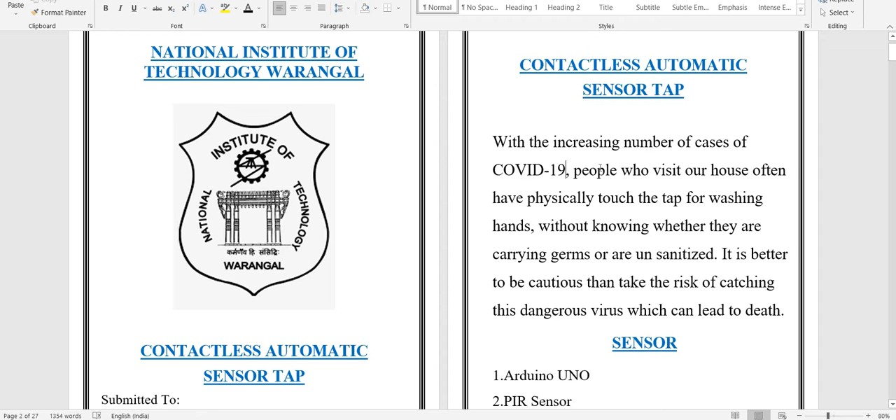So let us say that a person in these difficult times comes to your home. So the first thing that you ask the person to do is go to wherever your sink is located or wherever your bathroom is located and wash their hands. In that process, if they wash their hands, what they actually do is that they touch the tap for washing their hands or for allowing the water to flow.

Okay, so in that case, there is a chance of spreading COVID-19, because if a person who is touching the tap is infected, and a person who is completely healthy touches it, then there is a possibility that the healthy person can get COVID-19. So how do we prevent it?

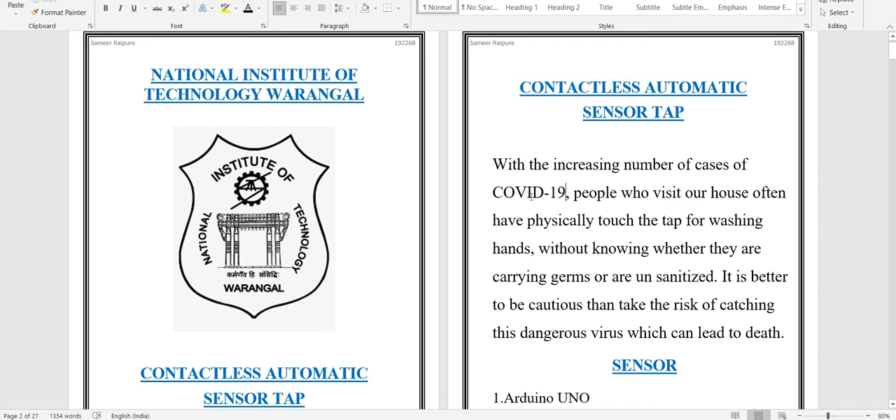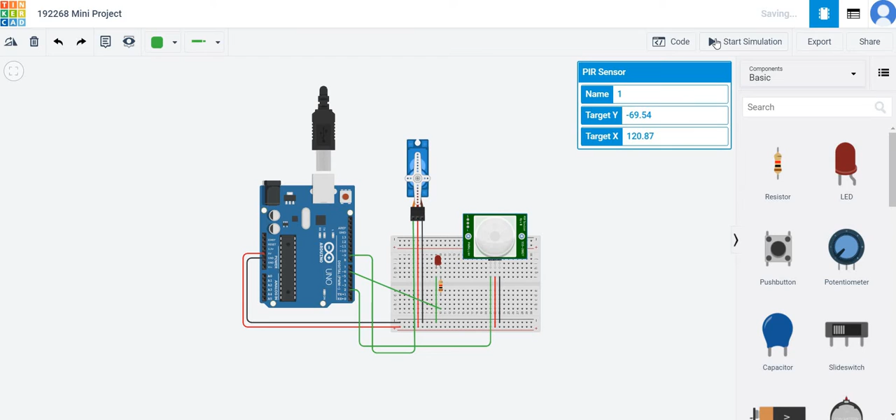So in my project, let us first of all go to the circuit diagram. I have taken a PIR sensor. So this PIR sensor, whenever something comes into its range, let us start simulating. Whenever something, ma'am, comes into the PIR sensor's range,

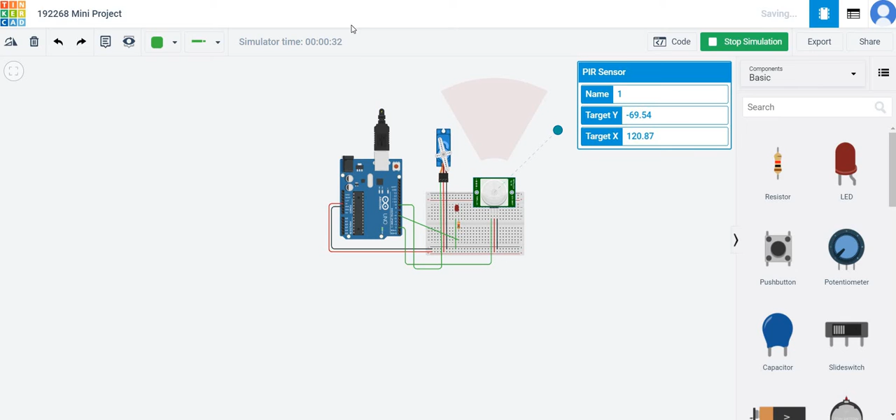then this servo motor that you can see here starts rotating, and whenever it comes out of the range, this servo motor rotates again and comes to normal. Okay, so if we are able to connect a tap to this servo motor, then we can have a functioning contactless automatic sensor tap. Okay, so speaking of 3D models, I have one here.

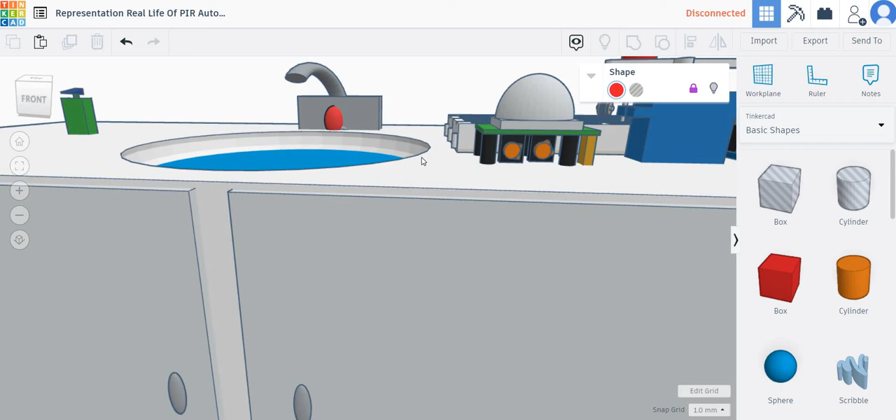So this is not the apparatus that would be there. This would be in a very miniaturized form, maybe in this box right here. As you can see, there is a box here, this would be in this box, and this red colored dome would most probably be the LED.

Okay, so what would happen is that if I come into the vicinity of the PIR sensor, let us say that maybe there is a hole and the PIR sensor is taking readings from here. If I come in this vicinity, then the water will start flowing and I would be able to wash my hands. As soon as I remove my hand or I move over here, the water would stop flowing. So this is a very efficient way.

Okay, now we are using this for washing our hands, and our primary concern is to prevent the physical touching and the flow of coronavirus. But this can also be used for water saving.

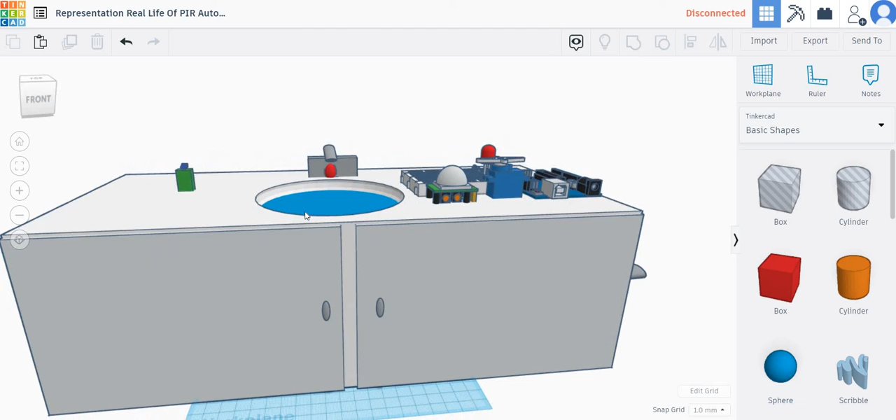Because as we all know, ma'am, when we are brushing our teeth, sometimes the water is on, and this leads to a lot of wastage. For a short amount of time it is not that visible, but for a longer amount of time we can completely see the wastage that has occurred. So as soon as you remove the brush from the region, the water stops flowing and helps to conserve more water.

Okay, now I have spoken about my project. Now let us go to the function of it. So as I've already said, this is a PIR sensor, and the PIR sensor and servo motor can be used for multiple things. In this particular case, we are using it as a contactless automatic sensor tap.

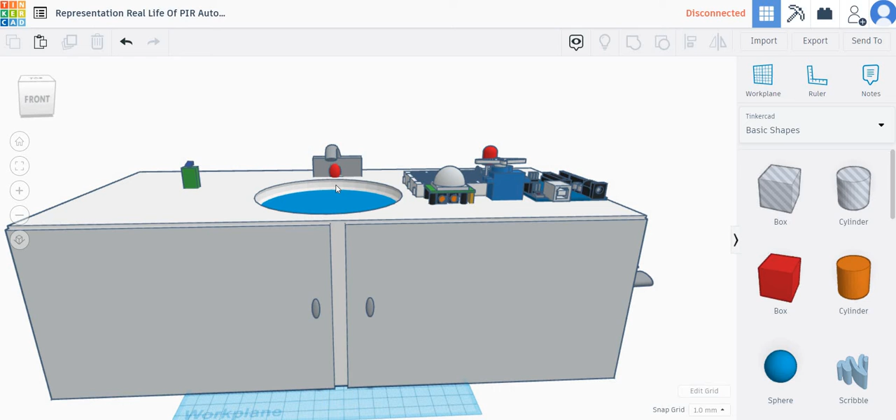Another way we can use it: let us say that this is a sanitizer dispenser, okay, and we put our hand over here and sanitizer flows in. So that might also be the case. Another purpose is not at all related to flowing water or sanitizer.

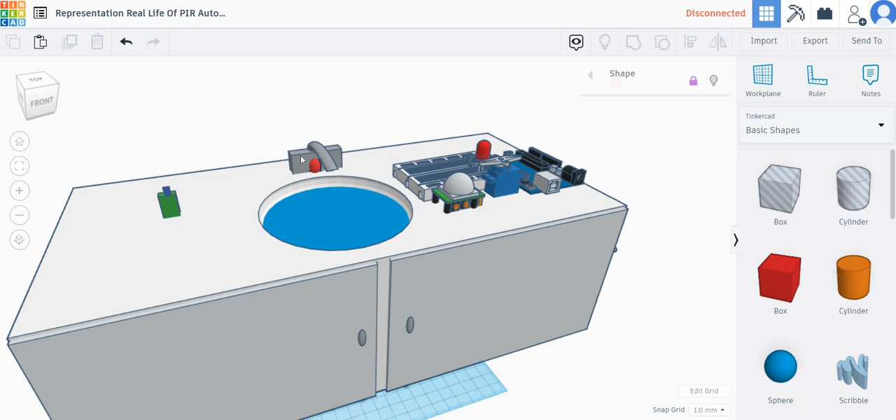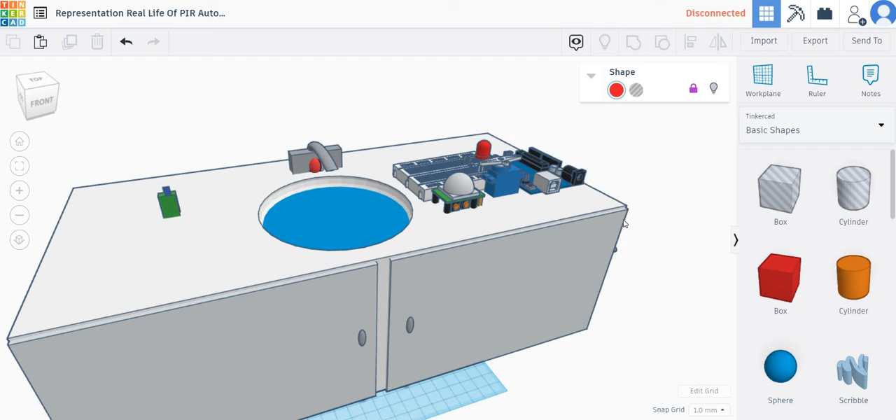Let us say that we use this same device, this box and this red light and the PIR sensor, and put it in front of our yard or our lawn. Then we would be able to know if someone is present there. We can connect buzzers or wires to it, and hence we would be able to know if someone has come into our house. Okay, so these are the applications.

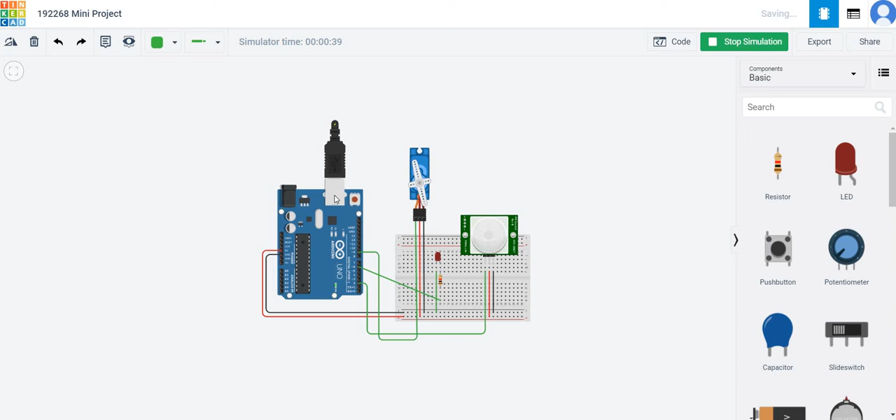Okay, now let us understand the circuit map. So as we can see, this is connected, meaning the simulation has started. As I've already displayed, this is a PIR sensor, and let us say that this thing is our hand, okay, and we are out of the vicinity of the PIR sensor's range. What if I go inside? As we can see, the servo motor rotates.

Now due to the rotation of the servo motor, we'll connect the tap over here and the water would start flowing. As our hand is there, we want the water to start flowing, and the LED is also glowing in order to demonstrate that yes, the water is flowing. So if in any case the servo motor has stopped, the PIR would detect and the LED would start glowing, but the servo motor would not work, and we would come to know that the servo motor is faulty.

Okay, now what we can see is that the servo motor is continuously on and the water is running. Now let us say that if I go away or stop washing my hands, then we can see the servo motor would come back to its original position and the water would stop flowing.

Okay, so same case, if I'm washing my toothbrush and I want some water on my toothbrush, then I come below the tap and the water starts flowing, and as soon as I bring the toothbrush close to my teeth, the water stops flowing. So this also helps in water conservation.

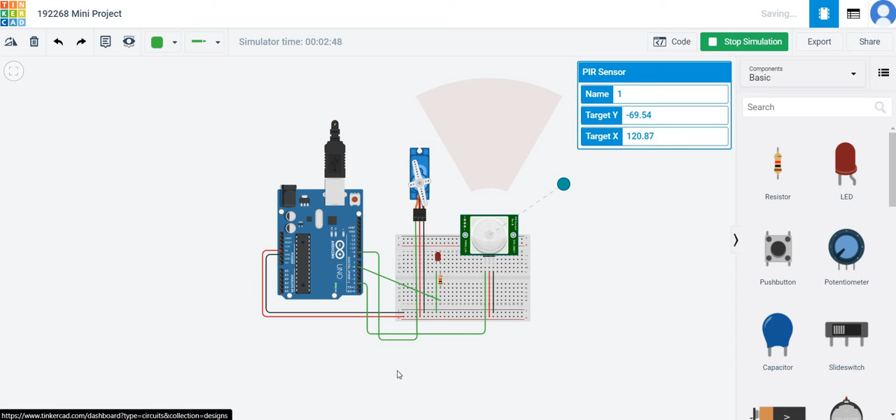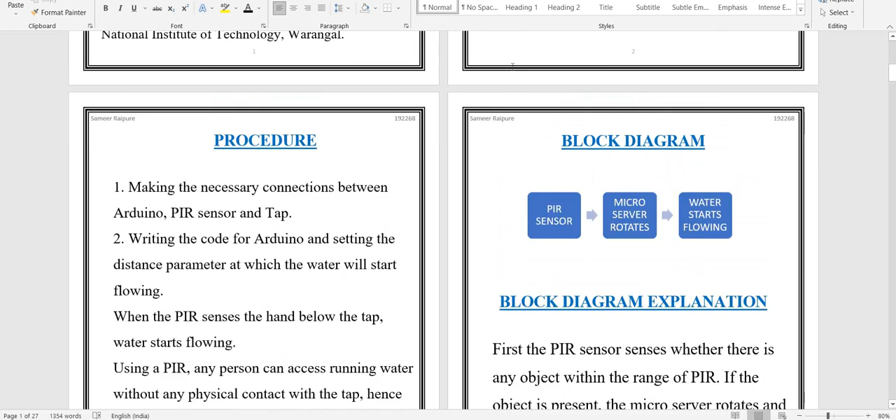So now let us go through my Word document. Okay, so these are the components that I've used. I've used Arduino Uno, the PIR sensor, LED, and resistor. The resistor is just for the LED. It is not really necessary, but since we are using an LED and we need to regulate it, we are using the resistor. This is a block diagram.

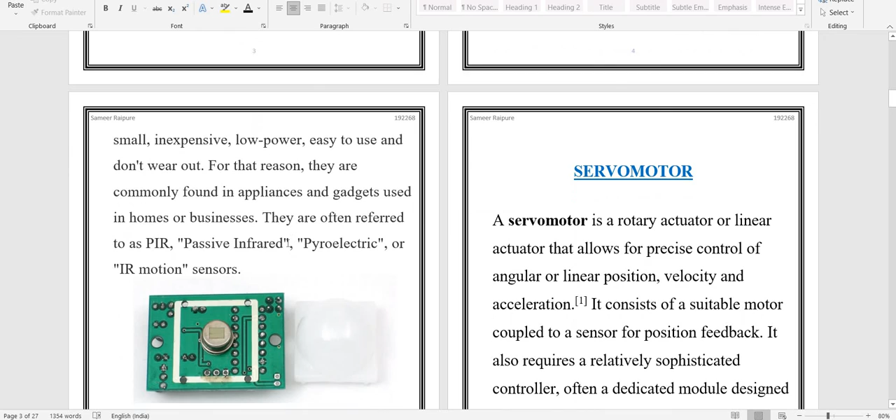The PIR sensor senses, and on the basis of that the information goes to Arduino Uno, and the Arduino Uno rotates the servo, and hence the water starts flowing. Okay, so here is the write-up for the PIR sensor, and the photo is here. This thing that you see is just for range modification. The actual device is only this. This is the main thing.

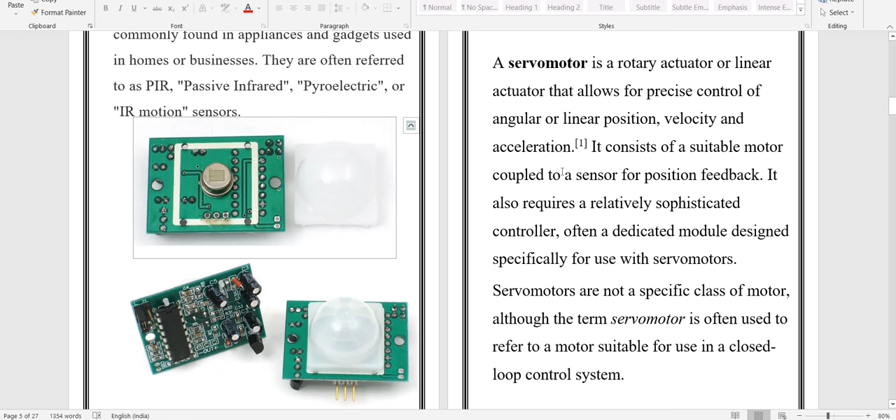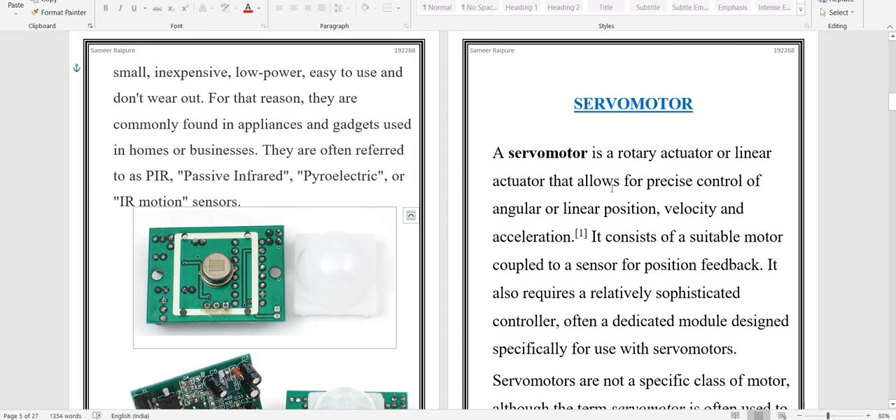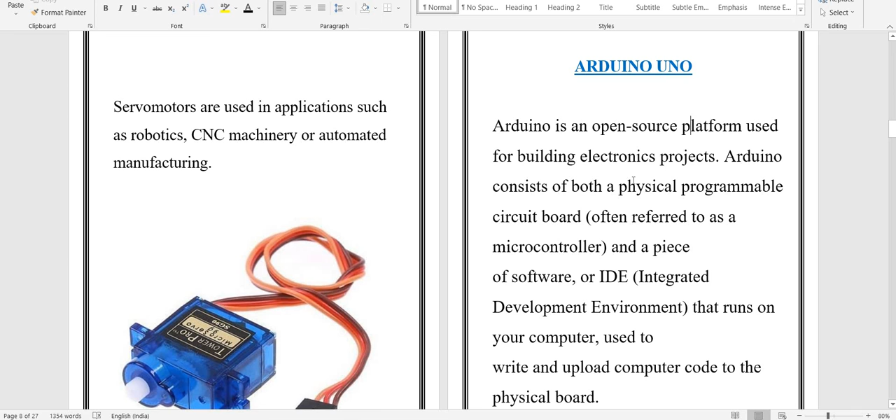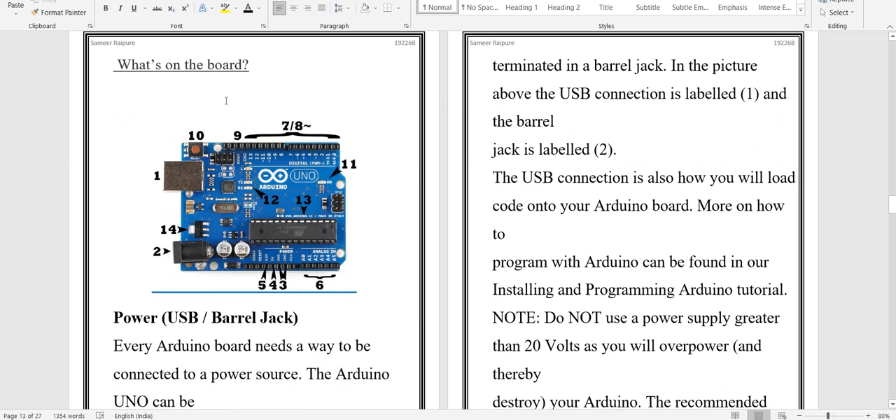Okay, and now we'll see what a servo motor is. A servo motor is nothing but a normal motor, but it is more precise. Okay, and this is how it looks. I have also used it in real life. And Arduino Uno. This is a programmable circuit board, and this is exactly how it looks. I have also explained what's on the board, which is available in my write-up.

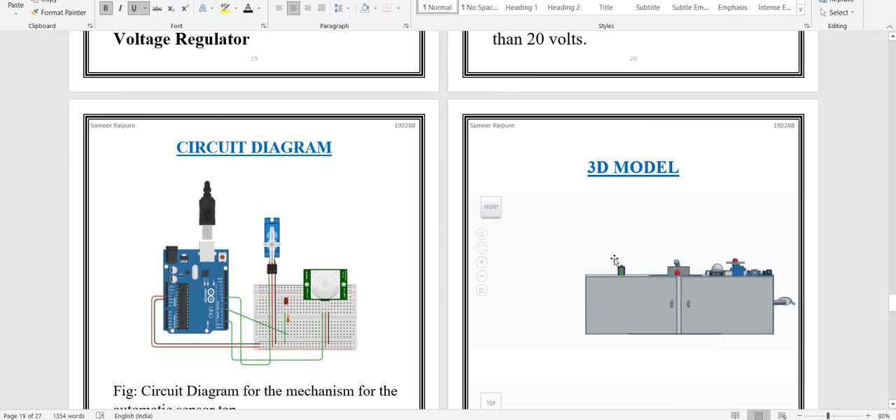And ma'am, I have also made a 3D model and I have attached all the diagrams. Shortly I will attach a link, and this is the code that I have used. So that's it for my presentation, ma'am.